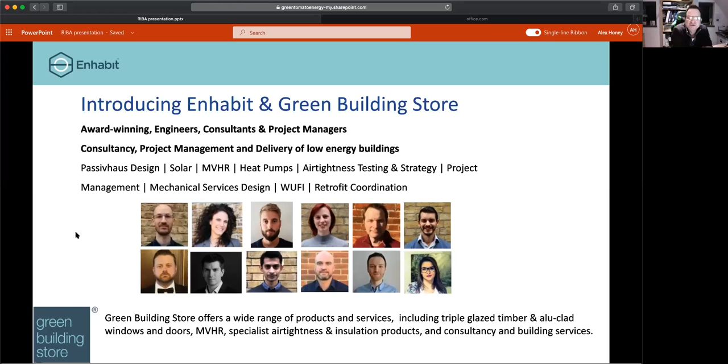I won't bore you about this too much, as I've got quite a few bits and pieces to go through. So just in case you're a bit worried about who I am and whether I really know anything, I'll quickly introduce a little bit about my background.

I did a civil engineering degree many years ago, then spent 10 years in the cement and concrete industry in various roles. I had the pleasure of attending a few manufacturers' advisory group meetings at the BRE in Watford when they were putting together the original Green Guide, which was fascinating in terms of understanding how different trade organisations try to outdo one another and offload their carbon emissions onto another industry. Quite interesting getting involved with those.

I then spent 4 years working for a cement manufacturer that was using waste materials - ground granulated blast furnace slag as a cement replacement material. That's what first got me interested in materials in the built environment.

We also do quite a lot of Passivhaus tradespersons training. I was lucky enough to be clerk of works at Goldsmith Street. I do energy calculations as a SAP assessor, I can also do some air testing and MVHR commissioning, and I also hold a health and safety qualification, so I get involved looking at CDM on site, which often provides lots of fun.

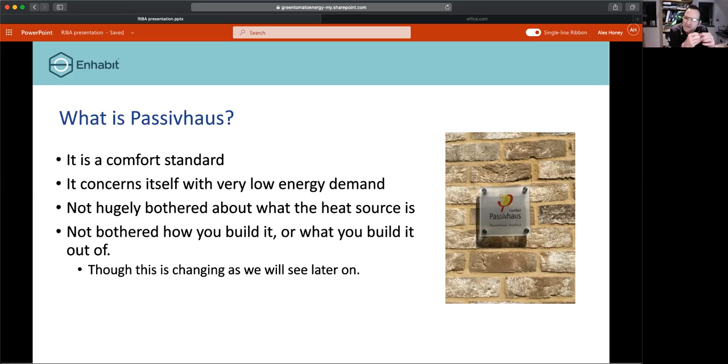And it's not particularly bothered about how you build it and what materials you use, although as we'll see later on, that is perhaps changing. So I'm going to start off by asking: why low energy buildings? Why don't we just build, as we've always done, really poorly performing housing and other buildings and just ignore the whole thing, just carry on? I think it'd be worth spending a few minutes talking about low energy buildings and why they are important to us.

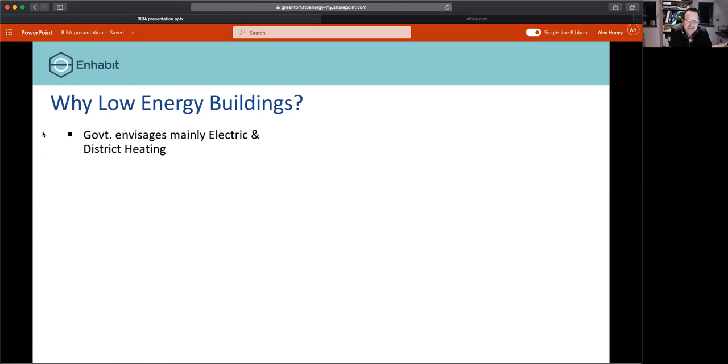So the government envisages that we'll mainly go over to electric or district heating. But the problem with that is that currently something like 85% of homes in the UK are provided by gas heating - your combi boiler or system boiler at home gurgling away. 85% of homes have those.

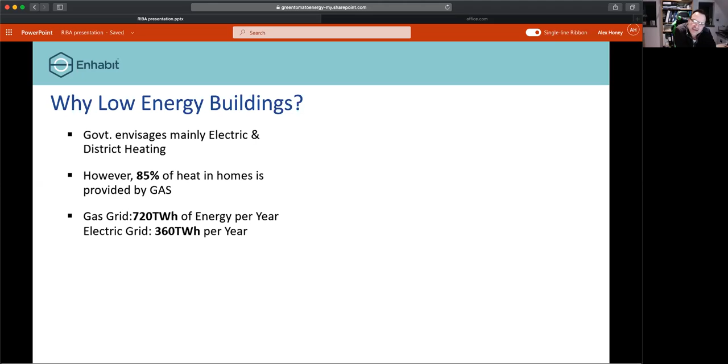If you look at the actual amount of energy supplied per year in terawatt hours, the gas grid is twice as large as the electricity grid. So if we decided to go electric and didn't do anything to our building stock in terms of energy efficiency, the electricity grid would have to be 3 times bigger almost instantaneously if we switched the gas grid off and moved over to electric heating.

Now, people far cleverer than myself reckon that to actually meet peak demand, the electricity grid would need to be 6 times bigger than it is now in terms of capacity to handle that increase in terawatt hours.

So as a nation, at a national level, we can't carry on building really poorly performing homes and other buildings, simply because if we move to electric heating, we won't be able to keep the lights on and provide all that heating via electricity alone. So it's going to be really important that we actually do something about the energy demand, the heating demand of buildings in the UK.

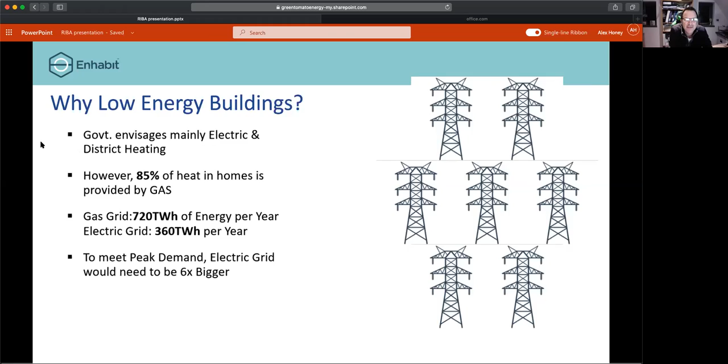I'm sure you've seen it in the press, and there's lots of lobbying going on, and the politicians, bless them, aren't necessarily the world's brightest, and they're all going, oh yes, that sounds like a great idea - so why not hydrogen in the home?

This is a bit of a personal beef about hydrogen in the home. The idea is that they're going to make hydrogen with sort of leftover or excess green electricity, but it's a really inefficient way of getting heat or energy to your house. Putting in an air source heat pump in terms of overall efficiency of the system is probably a factor of about 8 better than putting in hydrogen. So it just doesn't seem to make any economic or financial sense to try and put hydrogen into homes, because if we derive the hydrogen from electricity through electrolysis, it's just a really inefficient way of doing it.

And nobody wants to talk about embrittlement - I'll leave you to Google that. It's where hydrogen gets into metals and plastics and breaks them down. The actual running cost of hydrogen is incredibly expensive at the moment, and may come down, may not.

And then leaks - as a nation, we struggle to keep water in pipes. I can assure you that hydrogen as a molecule is quite a bit smaller than water. If we can't keep water in a pipe, we're probably going to struggle to keep hydrogen in a pipe, I would suggest. And Elon Musk, who's now edged into being the 2nd richest person on the planet because he's backed the right horse, has said hydrogen in cars is staggeringly dumb. And I'm with Elon Musk on that.

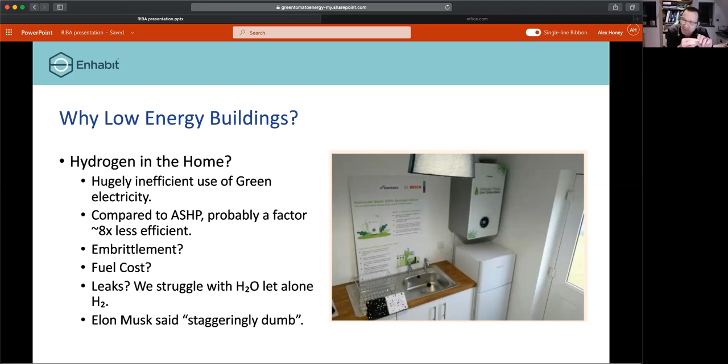So anyway, low energy homes. Our delightful government announced their 10-point plan this week, and we're all going to go around putting in some loft insulation and triple glazing. For about an hour and a half, the Future Homes Standard did get a mention in the 10-point plan, and then it mysteriously disappeared.

Now, we can only assume that Persimmons, like they did with killing off the zero-carbon homes back in 2015, rang the government up and said, how dare you put the Future Homes Standard into your 10-point plan to save the planet - we want to carry on building really poor quality houses. So it disappeared after 90 minutes this week.

So it's fascinating to find out whether or not we actually get the Future Homes Standard that has been kicking about now for over a year. So what is the Future Homes Standard? Well, effectively it's Passivhaus, but without the hard bits. By the hard bits I mean linear thermal bridging, which we'll touch on, airtightness, which we'll touch on, and indoor air quality, which we'll touch on. What it does talk about in the Future Homes Standard is Passivhaus levels of insulation to the floors, walls and roofs.

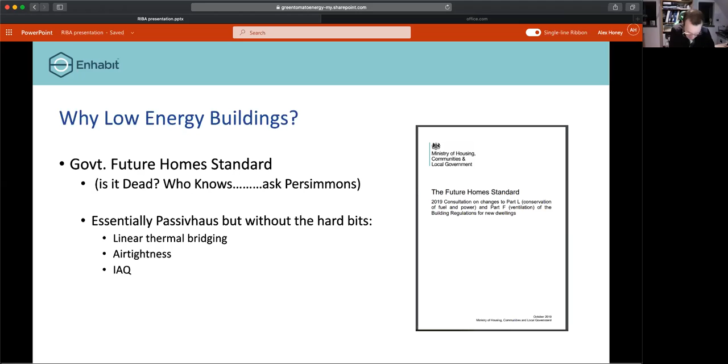It talks about putting in triple glazing, and ideally wastewater heat recovery, and potentially looking at heat pumps and other heating sources. But it's Passivhaus without the hard bits. So let's talk about the hard bits.

Linear thermal bridges are a funny thing, because the more insulation you throw at your building, the bigger the thermal bridges become in importance to your total fabric heat loss. If you put lots of insulation in the roof, walls and floors, there's a possibility the extra heat loss at the thermal bridges could account for 30% of your total fabric heat loss.

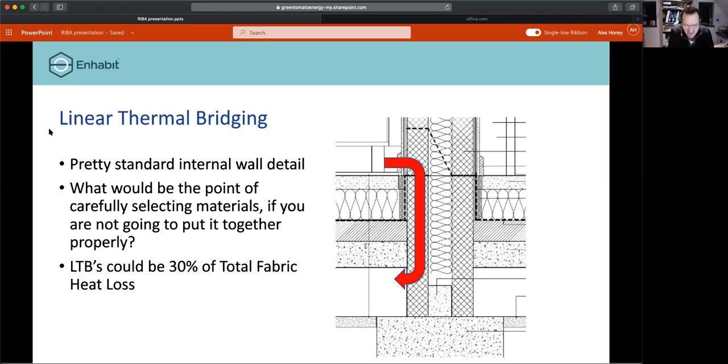So it's absolutely fundamental that if you're designing a low energy house, you really think about how you're going to join the bits together. I could do a whole evening on linear thermal bridging and bore you rigid, but I'm not going to do that this evening - you'll be pleased to know. But anyway, linear thermal bridging isn't really included in the Future Homes Standard, and I think it should be.

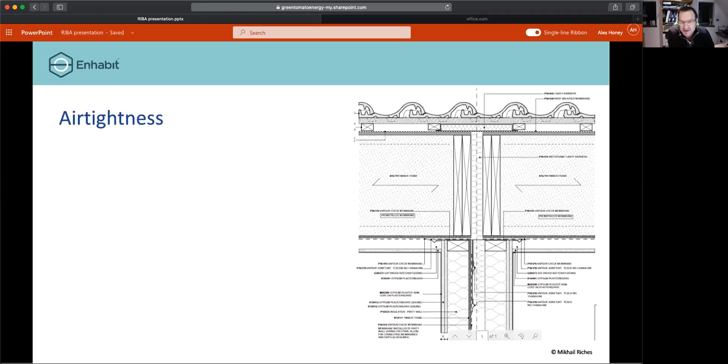Airtightness, yes. This is a section drawing I surreptitiously stole from Mikhail Riches' Goldsmith Street, because this is a passive house building, and it does actually show you where the airtightness layer belongs on the drawings.

Now, I do lots of energy calculations. I'm a very sad geek, and I get lots of drawings from lots of lovely architects and architectural technicians. It's pretty unusual to see the drawings actually identifying correctly where the airtightness layer should be in the building. It's normally left to the builder to sort it out.

And what they tend to do is go to Travis Perkins and buy a roll of that silvery tape, and they start sticking it here, there and everywhere. After a couple of weeks, it kind of falls off again. So as an industry, we don't really get airtightness layers very well.

And it isn't actually a dark art. It's really simple. You take a section drawing and draw a red pen around where you think the airtightness layer needs to be. If you don't put in an airtightness layer, then probably your building is going to leak air, and therefore it'll leak heat.

And the other thing you need to worry about is that an average family on an average day will probably produce about 11 litres of moisture. If you do not think about where that moisture is going to go, especially in a timber frame, there is a chance you might end up rotting the timber frame.

And here we are, talking about embodied carbon, thinking about building materials, trying to make these buildings last a long time and be really energy efficient. If we don't think about an airtightness layer and the thing rots after 20 years, it rather defeats the object of building low carbon, low embodied carbon buildings. So airtightness layer - really important.

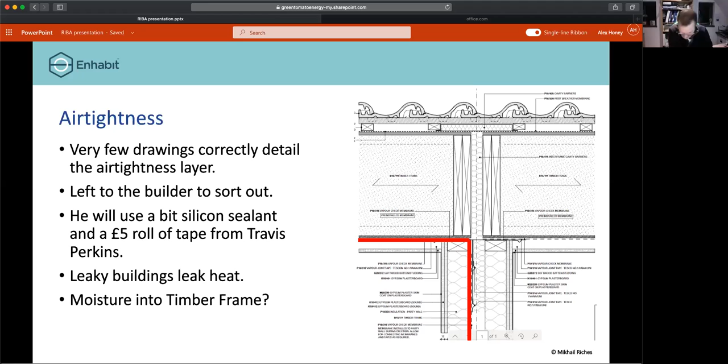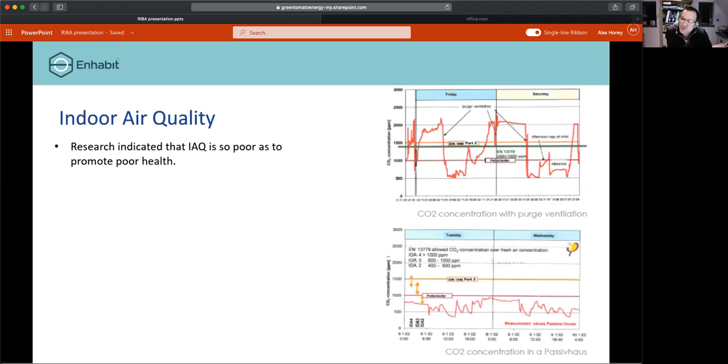Indoor air quality - as part of the research behind the Future Homes Standard and the Part L consultation document, it was admittedly a very limited piece of research, but interesting nonetheless. The research indicated that the indoor air quality of the houses visited was so poor as to promote poor health. It indicated that only 4% of homes fully satisfied Part F of the building regulations.

Let that sink in - 96% of new buildings are failing occupants. Increased air tightness in modern homes is making the problem worse.

And so I asked the question, how much longer are we going to build this stuff? How much longer are we going to build buildings where we don't think about indoor air quality and let the occupants down? Especially this year in COVID, it's one of the big things everybody's been talking about. If you go to your local Sainsbury's, you might hear the ventilation system going ten to the dozen, trying to push in loads of extra fresh air, because we've never really set ourselves up to think about indoor air quality correctly.

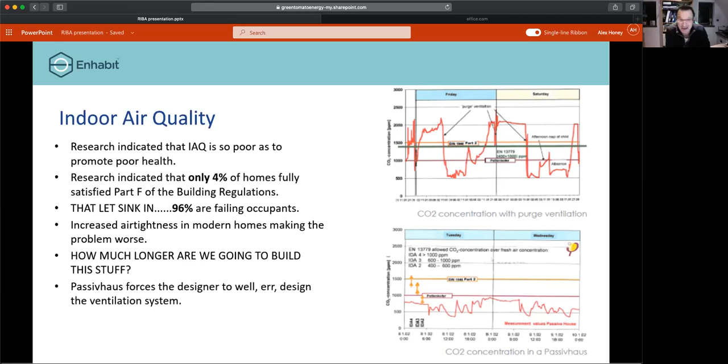Passivhaus forces the designer to actually design the ventilation system. Passivhaus will supply the correct amount of fresh air per occupant, irrespective of the weather. So indoor air quality is really important, and it's not really in the Future Homes Standard to any degree.

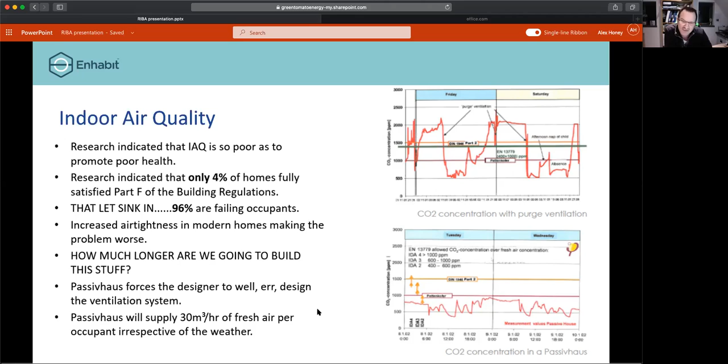So I'm going to get off my horse, and we're going to talk a little bit about embodied carbon. So what is it? Because I'm but a simpleton, I like the simple things. It's basically the carbon dioxide emissions associated with making a building, which I think is a pretty sensible, nice way of putting it.

And if you want the posh version, more precisely, embodied carbon covers greenhouse gas emissions that arise from the energy and industrial processes used in the processing, manufacture, and delivery of the materials, products, and components required to construct a building. So that's what embodied carbon is.

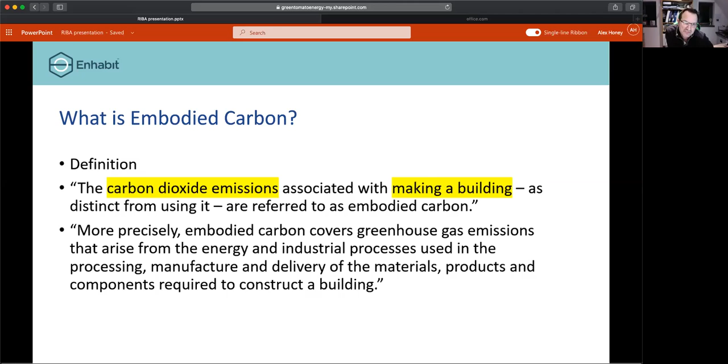So what's the problem? Well, if and when Persimmon let us build low energy homes en masse, our total carbon emissions will actually start to drop in terms of the carbon emissions derived from using the building, from in use. So our gas bill, our electricity bill, or whatever, that will start to drop.

And as that drops, those carbon emissions used in operation of the building drop, the proportion of carbon tied up in the building becomes more and more important. So as we get better at building low carbon homes that require less heating, and our carbon emissions from operating the building go down, it becomes more important that we think about the embodied carbon of the building.

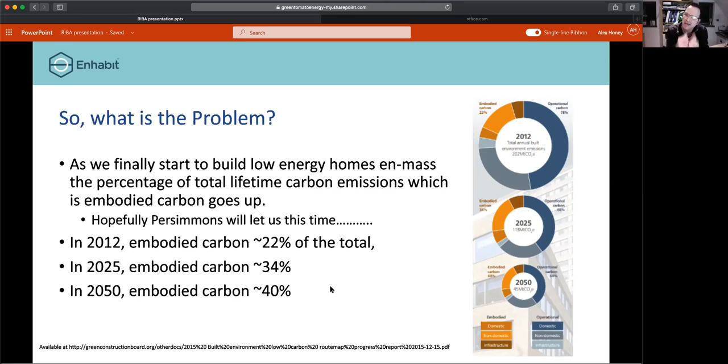It's envisaged that probably by 2050, when we're doing really good low energy buildings, embodied carbon will add up to about 40% of the total carbon of that building in its whole lifetime. So it's going to become more important over time, and I can't emphasize that enough. That's the issue, it's going to become a bigger issue. We're going to get asked more about embodied carbon as our buildings get more energy efficient. It becomes more important.

So what is the solution? Well, the classic little symbol: reduce, reuse, recycle. We get told to use this when we're thinking about stuff in the home, but equally you could think about it regarding the home itself.

So we could reduce our need for new buildings in the first place. Working from home this year has perhaps made us think about making buildings more adaptable, so we need fewer buildings. I was talking to somebody at a university recently who said they think on their university estate they might have 10,000 square meters of building they really haven't got a use for anymore. So it does make us think about whether we actually need to go around building lots of new buildings, because it's not very green and environmentally friendly building new buildings, to be honest. Let's be honest with ourselves.

So reuse - can we repurpose existing buildings via material change of use? COVID again has been really interesting this year, in that it's really pushed buildings, certainly the high street, to be repurposed, I would argue. I'm aware of quite a few projects in the city where the upper stories of quite a lot of department stores are looking to be converted into housing of some description. I have to say, a lot of it isn't done very well in terms of energy performance, but that's for another subject, for another day.

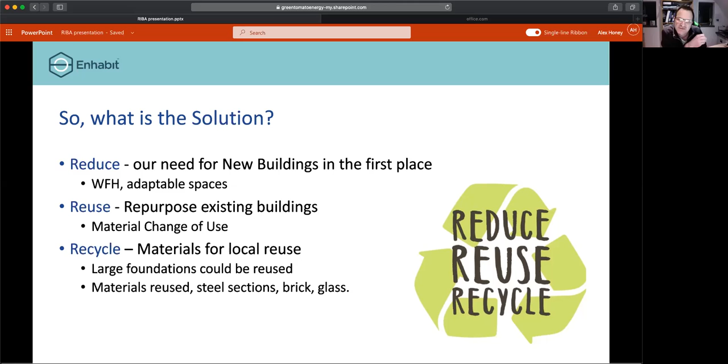So what I'm implying is that on really big buildings, the fairly common method of construction, a concrete frame, there's no reason, because of exposure classes when you look at them, that the building won't last pretty much forever. Most concrete structures, I know you have to talk about depth of carbonation and things like that, but generally speaking...

most concrete frame buildings will last, if they've got some sort of facade to them, pretty much indefinitely. So is there an opportunity, instead of having a retained facade project, to turn it inside out and just take the facade off and make it look really different, but actually most of your embodied carbon is retained within the original structure. So it's sort of a heavy refurbishment.

Do we really need to knock some of these buildings down? Can we reuse elements of the building and retain them? Even things like lift shafts, cores and basement areas could all probably be reused. Certainly in London, it's something we probably need to pay more attention to.

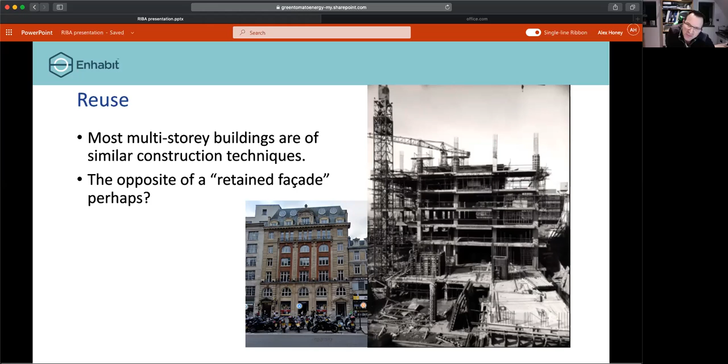If you're wondering, Halton House, which is the photograph there, I was a student engineer, and that looks like a Victorian building, but actually it's a brand new office block behind a retained facade.

So taking it to its nth degree, I'm just highlighting that if you very carefully select your materials, there's no reason why your building couldn't last 2,000 years.

And if you could repurpose or reuse the Pantheon, it would be a fantastic building in terms of its embodied carbon over a 2,000 year period, it would be negligible. If you looked at CO2 per year, that's what it is.

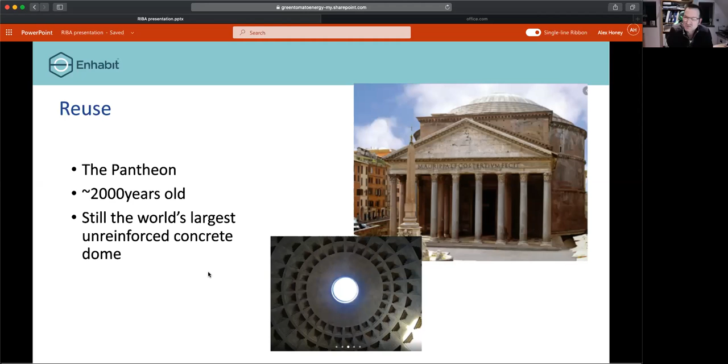So there is an opportunity to really think about buildings perhaps in a different way, as opposed to just building a new building. So, okay, you've decided you can't reuse the building.

There's nothing you can do with it. You want to build a new building. So it has to be new build. Then what? Well, obviously, from what we've already discussed, it needs to be a low energy building. So that's a given.

And if we are going to build a new building, is there an opportunity to use recycled materials? Is there an opportunity to use locally sourced materials? Is there an opportunity to use low carbon materials? These aren't always suitable, but it's worth asking the question.

And we'll run through some different materials and just give you a brief flavour of my thinking, is what I have in mind.

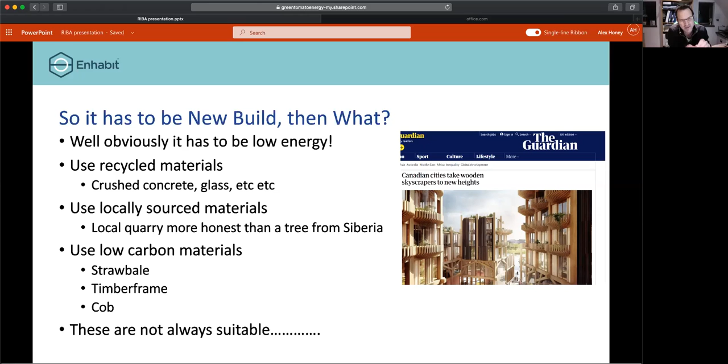So metals, in terms of steel, an obvious one, generally they are very easily recycled. And certainly in the UK, there's very much a supply chain in place to recycle those sorts of materials, metals.

I suppose we're all used to reading about lead theft of church roofs. Metals have high value, so they are often recycled. So there is an opportunity to look at recycled content of the materials that you're specifying.

Ideally, we want to recycle metals because the extraction of metals is often very highly polluting, and often it takes a lot of energy. Aluminium is smelted in electric arc furnaces from bauxite, and I can assure you that the lights flicker when they turn the electric arc furnaces on. It uses huge amounts of electricity.

And in the bottom right-hand corner, I've put in some figures I found. I think these are ICE figures, I think. And it's identifying the amount of embodied carbon in CO2 per kilogram of material.

So if you want 1 kilogram of aluminium, it will produce about 9 kilograms of CO2 to give you that 1 kilogram of aluminium. And that, I believe, from memory, these are UK figures that do include an element of how much is actually recycled already and put back into the supply chain. So these aren't necessarily virgin material figures, these are UK figures based on recycling metals.

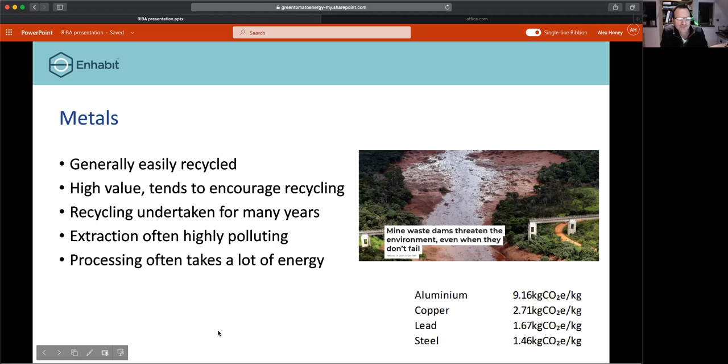So metal frame Passivhaus, I'm not aware of any in the UK. I did find some on the Passivhaus Institute website. There's a few in Germany, and a few in France, and one or two bigger buildings are in steel frame. I have to say, I don't know a huge amount about Passivhaus.

What I did read up on and buy into is that with a steel frame, if you took a traditional portal steel frame, as you can imagine where the steel frame sits on a concrete pad, you have to think really carefully about linear thermal bridging. We don't want any heat loss down through the steel. So you have to spend a lot of time thinking about how that steel frame works, such that the insulation goes over the top of it and you don't end up with any thermal bridging.

You also need to make sure that the airtight barrier is on the outside of the steel frame for it to be continuous, but it still needs to be inside the thermal envelope. So there's quite a lot to think about when you're doing steel frame buildings to Passivhaus.

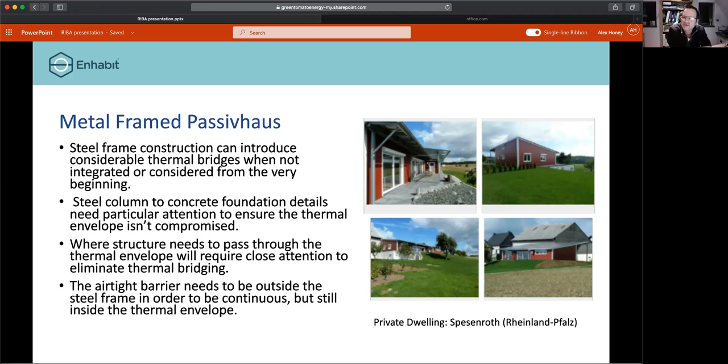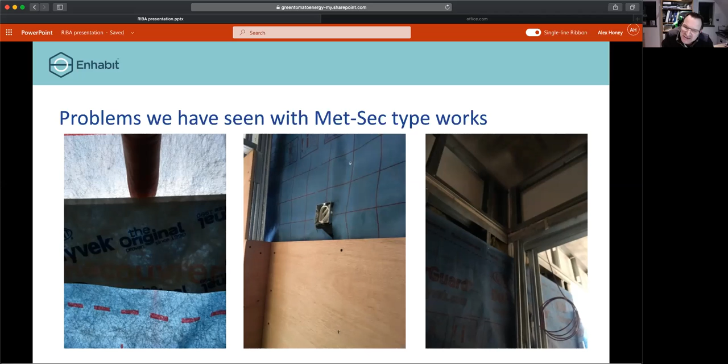The airtightness layer up above needed to go in before that doorway went in. Because if you now try to retrofit the membrane to the top part of that wall, it's going to be really difficult to get an airtight seal where that doorway is. It's almost impossible. So think about the order in which things go into a building such that it's easy to create an airtight envelope.

Concrete - I could do a whole lecture on concrete, but I'm not going to do that to you. I'm far too kind. What I would say is that roughly 50% of the embodied carbon is in the cement, as in Portland cement, not in your waste products like pulverized fuel ash and ground granulated blast furnace slag.

Weirdly, globally, we're actually more worried about running out of suitable sand than we are about running out of cement. And if we're talking about embodied energy and sustainability, it's worth flagging up that in London and the southeast, most of the aggregates come out of the North Sea, so it's not necessarily a hugely sustainable source of material.

You could try using crushed concrete into your new concrete. The problem is a practical one - we're not very good at investing in concrete plants. If you go to a ready-mix concrete plant here in Norwich, for instance, you won't find one capable of taking a 40 mil stone. And if you crush concrete down to less than 40 mil, it ends up mainly as dust, which isn't a lot of good to anybody.

We're actually hampered here, locally and nationally, by ready-mix plants not being able to take different aggregate sizes and different aggregates, such that we could go for a higher recycled content concrete. So it's all a bit disappointing, really.

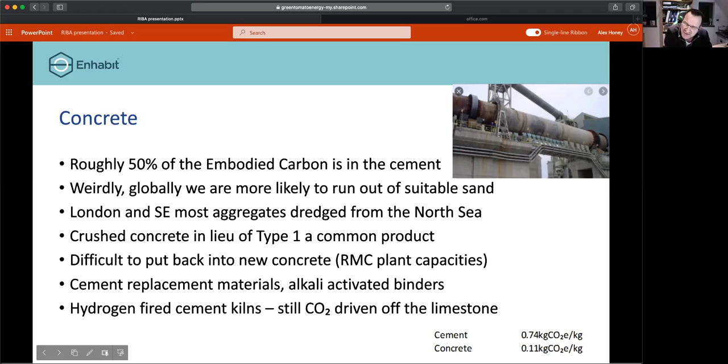So normal concrete is always going to be a fairly high embodied carbon material, and so you need to try and minimize the amount that you're using. But interestingly, per kilogram, concrete is only 0.11 kilograms of embodied carbon per kilogram of product. So in some ways it's much better than steel.

ICF - hopefully you're vaguely familiar with ICF. ICF is insulated concrete formwork. It's basically Lego bricks made out of polystyrene, and you put them together, and it leaves a void in the middle which you then fill up with concrete to create your structural wall. Really nice system - there's several around, Beco, Logix, there's others. In terms of putting the Lego bricks together, it's as easy as anything, pretty much, once you've got your first base course down.

What I would suggest is that casting the concrete successfully is quite an art and quite tricky. Therefore, if I was doing a self-build using insulated concrete formwork, I would put the Lego bricks together, and then I'd get specialist guys in to do the concreting element for me. It can go wrong very easily.

Weirdly, these buildings are cool in summer. Historically, we're told that if you have a lightweight structure - and in this case, indoors, if you think about it, it's polystyrene and plasterboard for the first couple of inches of the wall - you would be told that's a lightweight structure and there wouldn't be any cooling effect given. But there seems to be some kind of more deeply odd relationship going on with the concrete hidden away within the structure. So these buildings, somewhat counterintuitively, actually work really well in summer months.

One of my kind of questions is that a lot of these products are a mixture of polystyrene and nylon, and then obviously you've got concrete in the middle. So the question is, at the end of these buildings' life, are they recyclable?

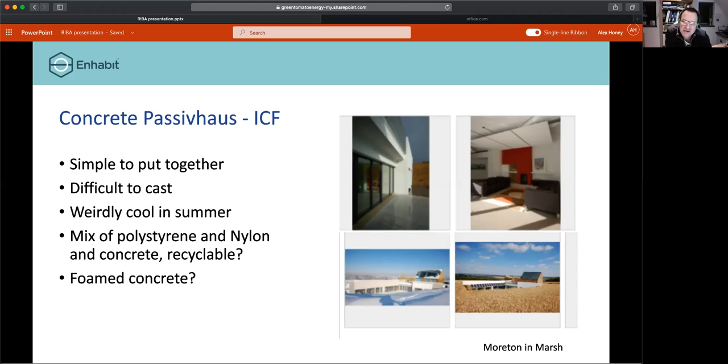Wood - yeah, that fantastic renewable product. It is really good, and it's probably the best material out there in terms of embodied carbon. But a lot of it, most of it, is plantation wood, which isn't considered very biodiverse. Also, soil erosion and soil acidification are known problems when we're actually harvesting plantation wood.

And I will also flag up, especially for some of you lovely people who do like your Siberian larch - it has travelled 3,500 miles to get here. So you do have to wonder about the embodied carbon of hauling wood halfway across the globe. So you kind of think, well, what about local wood?

At the Enterprise Centre, they did use wood from Thetford Forest for some internal work, considered non-structural. It's great because you chop the tree down in Thetford and bring it to Norwich, but it needed grade testing. So the trees actually went to Ireland to be tested, then brought all the way back. It went from Thetford to Norwich via Southern Ireland, which seems slightly daft. If we are going to use homegrown wood, we need UK testing facilities, or a way of using non-structural timber that doesn't need testing. The other thing about the UK is we're a maritime environment and trees tend to grow too fast, so most of our softwood is not of great quality, unfortunately.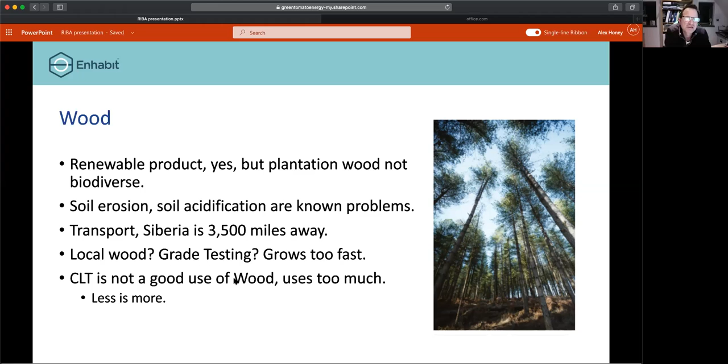Timber frame is quick to erect. These panels come to site, and you can put a whole house together in the space of a few days if the roof structure is pretty straightforward. As soon as those fantastically able architects come up with great ideas of big wide openings that look fantastic on drawings, you're automatically introducing steel. Steel goalposts and timber frames just complicate things in terms of linear thermal bridging and getting airtightness to work. So if you can, because everybody loves big bifold doors, get away from that and work to the maximum spans allowable within a timber frame, it would be much more beneficial for everyone.

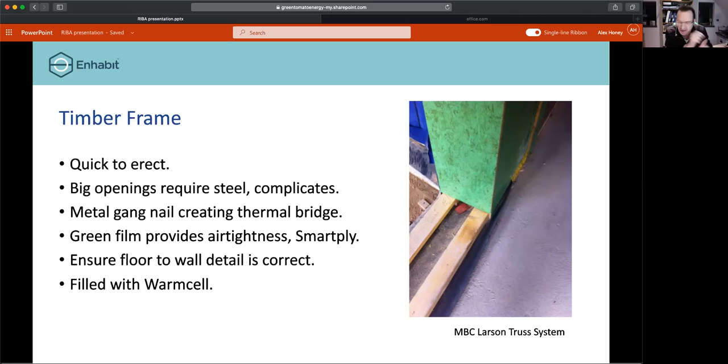This particular building, and also Goldsmith Street, were filled with warmcell insulation, a system developed in Wales originally. The company went bust, all the kit went out to Czech Republic, and we now import all the warmcell, but it's basically mashed up and treated newspaper in a pulp form. It's a fantastic product, very low carbon - you're quite literally recycling paper into insulation material, really nice material to use. There are some really good installers that go around putting this stuff in, and I take my hat off to them. It's quite an art when you watch them use a magic hoover to place the warmcell - one of those dark arts, so you kind of go, that's quite impressive.

Clay brick - quite a lot of it these days, unfortunately, is imported. The bricks at Goldsmith Street, for instance, came from Belgium. Wienerberger is Austrian in nature, so there's quite a lot of brick that we seem to import. It's a very heavy material, so to transport it halfway across Europe is, in terms of carbon, really not a very bright thing to do. You've then got quite high firing temperatures of about 1,000 degrees centigrade, so you're using a lot of gas, getting quite high embodied carbon that way. If we went back to using traditional lime mortars, we could actually reuse those bricks over and over again.

I live in a tatty cottage here in North Norfolk, and to be able to take down a little bit of lime brickwork and redo it with lime mortar means those bricks are 200 or 300 years old, and they're almost as good as the day they were made. They're soft Norfolk reds, so you've got to be a bit careful with them, but they're still ultimately usable.

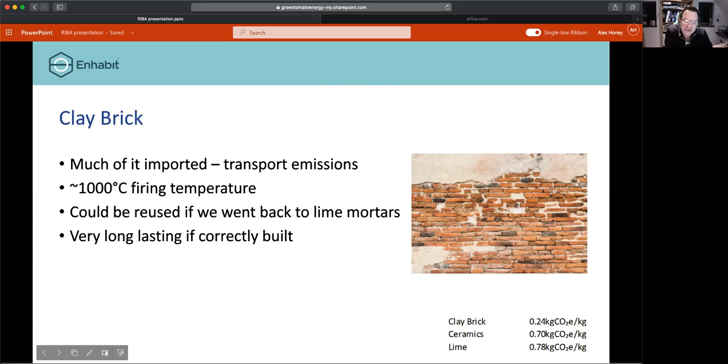I've put in the bottom right-hand corner the embodied carbon per kilogram of brick and ceramics, things like wall tiles, and then lime itself. So clay brick, I like it a lot.

A play on clay brick is Porotherm, which is like an aerated, extruded sort of brick, and they used it at Carrowbreck. A really nice product, and when you actually handle the material, it reminds me of the clay pots you find in the garden centre.

It's quite brittle as a material, so when you go to drill it, as in to put up curtain rails or other stuff during construction, it wasn't the easiest product to use from that perspective. It's meant to be machine planed, so when you put it together you can use thin joint mortar, and you just dob it together - there's no mortar to the perps. You're laying a whole spread of mortar across a wall, and then you're just dobbing these porotherms together. What the bricklayers found was that these blocks weren't quite true enough, and they were ending up with tiny little wedges here and there to keep the brickwork vertical. It turned into a relatively expensive process.

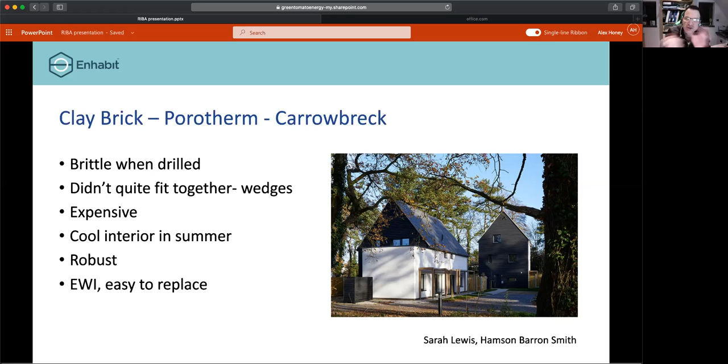What I would say is that these particular buildings at Carrowbreck - it was a really hot summer, and it was a joy to go into these buildings on a hot summer's day. They were really nice buildings to be in. It's a very robust system. The other thing I like about using Porotherm - it's a solid wall, there's no cavity in this method of construction - is that your external wall insulation is all on the outside, and if it ever gets damaged, you can see the damage and it's easy enough to replace. So I quite like it as a system, it's got a lot going for it.

Now we're getting into a kind of - this looks a bit more interesting. Hello, what's going on here? Hang on, sorry, I've just got something coming out on my screen. Let me just get rid of something on my screen, because hopefully, right.

So cob, or straw bale. Cob, which we would locally call clay lump, you do see a bit of it in Breckland in traditional buildings, and I've seen one or two buildings along Wymondham way as well. It would be a mixture of straw, clay, probably a bit of cow dung, sand, and sometimes a bit of lime to create lumps or bricks locally.

If you're making cob, it would be more of a rammed earth sort of setup. So you'd make shutters as though you're doing an in-situ concrete wall, and instead of pouring concrete in, you chuck the cob in, then chuck a couple of children in, or something suitable, and you jump up and down on it to actually compact it.

It's one of the most ancient materials out there, and it's a fantastic material. It's quite often quite slow. The material costs are really low, but the labour costs are really high. So you tend to see cob being done as a self-build, because it's not very high tech and you've got plenty of time available if you're self-building, and the material costs are really, really cheap. Unfortunately I've never had the pleasure of doing any cob or clay lump myself, which is a bit of a shame.

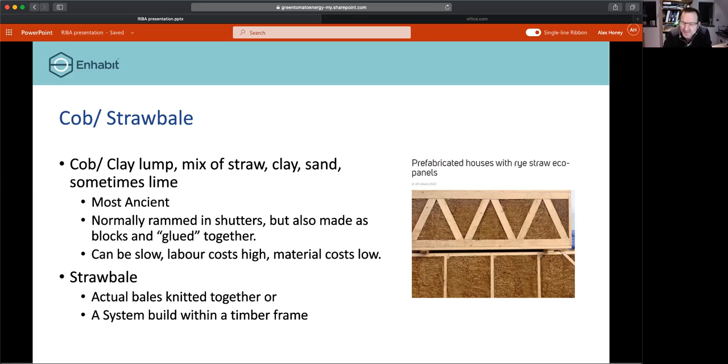The other system is to use straw within a timber frame, as per the image on the right. This particular one is called EcoCocon. I quite like this - it's a really quick system, and it got used on this house, which belonged to the late great Martin Newton, who was one of the sustainability and energy guys at the University of East Anglia.

Architecturally, it's not a particularly interesting house externally, but inside, it's probably my favourite house. It's used clay plasters internally, we've got MVHR in there, so the air quality is really, really high. There's no gypsum plaster. It's a beautiful building internally, and Lil, Martin's widow, is really keen for people to come and see this building. It's a Passivhaus in terms of its standard, and it's a really nice building to get people thinking about materials.

It's got a lime render externally, and as I say, clay plaster work inside. It is genuinely worth a visit as a building to admire the internals, not the externals.

As a system, it was really quick to put up. I think they did the whole of the straw in a week. So you've got a building with a roof on within a couple of weeks. The actual putting the timber frame together with that straw in it is a really fast process.

Obviously, the clay plasters, if you're doing that by hand, they had sort of family days where they got 20 people and a barbecue going, and they all started splattering clay everywhere. That is a slow process, and perhaps that's where we need as an industry to think about how we could speed that process up, such that it could be used in proper buildings on proper sites, and perhaps even adopted by volume house builders, because it's a very low embodied carbon way of building our housing stock.

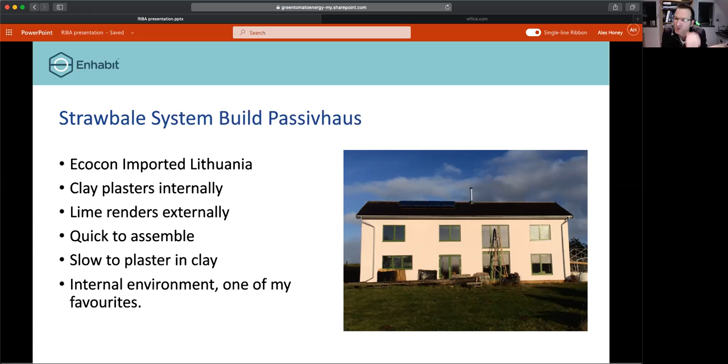Plastic, I've just given you a selection of those. EPDM, so that's your sort of single ply membranes on roofs. I did do quite a lot of reading. You can recycle it, and Firestone are looking at recycling EPDM, but not if it's glued down. So they're looking for sort of mechanically fixed methods of doing flat roof construction.

That takes us into thinking a little bit about how we use our materials and how we put our materials together. At the moment we think about CDM and health and safety. You're obliged as designers to think about how that building is going to be built and how it's going to be dismantled. We probably need to think about how we dismantle a building from a recycling those materials perspective in the future. Your choice of glues and adhesives or mechanical fixings might determine whether or not that material could be recycled at the end of its life.

And those decisions that you make will have an impact on those in 60 years' time that then start to fiddle with your building. So they're the things that perhaps we need to think about - we're just in its infancy with this, and perhaps we need to give it a lot more thought.

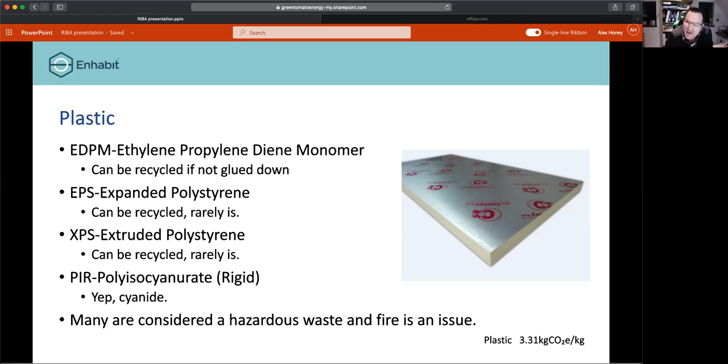All of those materials are oil-based, and as you can see, they've got quite a high amount of energy embodied in them. You've got over 3 kilograms of CO2 embodied per kilogram of material. Now obviously these are being foamed up, and most of them are lightweight, so your 3.31 kilograms of embodied carbon will go quite a way, but they are energy intensive. And although most of these materials can be recycled, I haven't seen much evidence that we actively recycle these and put them back into materials, either UPVC windows or insulation materials. I think it's coming, but it's not really happening in a way that it should.

Yeah, gypsum. We all think about our 3 mil skim, don't we? A bit of plasterboard, chuck it up, skim it out, and off we go. We don't really think about plaster, but it's an anhydrite binder - that's calcium sulfate - and most of it comes from coal-fired power stations, unbelievably.

We discovered with acid rain that most of these coal-fired power stations were belching out all sorts of sulfurous fumes. So they started to desulfurize the gases coming out of the flues at coal-fired power stations. It's an electrostatic process - it's like a mesh that's electrostatically charged, and then these sulfur products fall out. So we're actually using gypsum plasters that are based on coal-fired power stations. And so the question is, what happens when we stop burning coal?

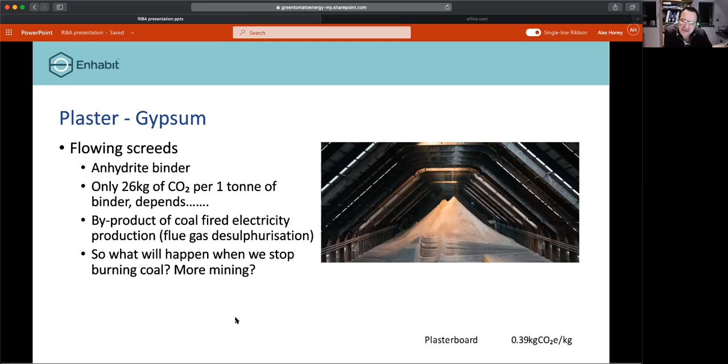Where's this plaster going to come from? Are we going to have to start digging more holes in the ground? It's a common enough material, but at the moment we're making use of it as a byproduct. Don't forget, naturally occurring gypsum ends up in toothpaste, cosmetics and God knows what else. So it's going to become more expensive once the coal-fired power stations are shut down, and we need to think about where these materials will come from in the long run. It's an interesting material, with an interesting future ahead of it.

I'm only going to touch on this briefly because I get asked a lot about thermal mass in Passivhaus - do you build a huge, dense concrete building, or a lightweight timber frame, in terms of thermal comfort? In the round, Passivhaus isn't overly excited about high thermal mass. It does take it into consideration within the calculations, but it would rather you think about it on a daily basis, not a seasonal basis.

You don't want that building in summer to get ever so slightly hotter each day. In really high temperature periods, really hot summers, you don't want it to be 21 degrees one day, then 21.5 the next, then 22, and so on. That's not what you really want. So try and think about thermal mass and what it can do for your building on a daily basis. It can certainly ameliorate the maximum temperature you find. If you ever walk into somewhere like Norwich Cathedral on a really hot summer's day, you can really see the benefits of high thermal mass.

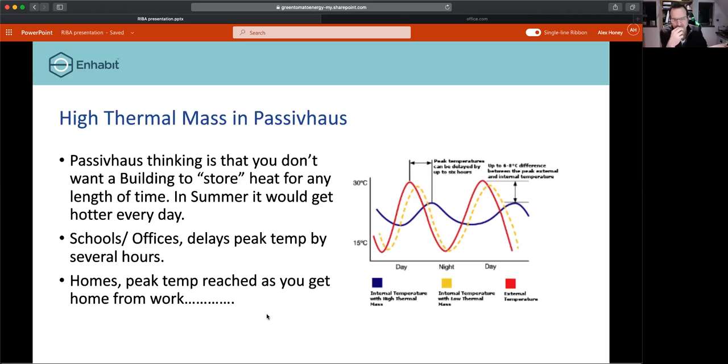The downside is that it tends to shift the peak temperature later in the day - you get this 4 or 5 hour shift. Typical peak temperatures are perhaps 2 or 3 in the afternoon, but in a high thermal mass building your peak temperature is actually reached at 5 or 6 o'clock, which in a house is when you get home. So be mindful - high thermal mass might make sense in an office or educational building, but might make less sense in a house. Just be really careful about thinking about thermal mass.

As I said at the beginning, Passivhaus wasn't really interested in materials or embodied energy. That is starting to change, and there's a lot more research and talk within Passivhaus circles about embodied energy. Here in the UK, the Passivhaus Trust and the AECB, the Association of Environmentally Conscious Builders, have been working with a guy called Tim Martell, who's developed software that plugs into the Passivhaus planning package and picks up about 80% of the materials used in the building. This means we can quickly work out the embodied carbon within a building by modeling it in the Passivhaus software, pressing some extra buttons, and it tells us what that embodied carbon is.

What I've put at the bottom is: to improve performance looking at embodied carbon, we need to start by measuring where we're at now. At the moment, if I asked any of you lovely ladies and gentlemen what the embodied carbon of your building on your design desk today is...

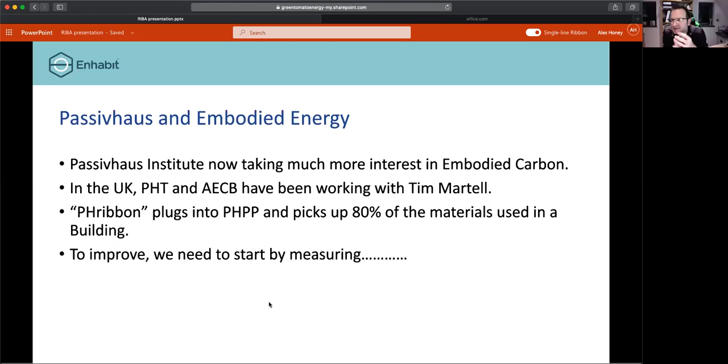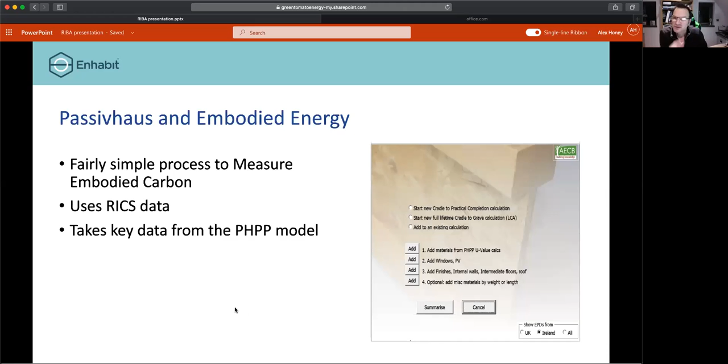Taking a lot of data that we're entering into the Passivhaus software, reusing that data, and taking some RICS data about embodied carbon, it starts to tell us what the embodied carbon is for the whole building. It's pretty straightforward - what used to take days and days, we think we should be able to produce meaningful results within about a day's work, which is much more useful and cheaper. The outputs available are CO2 embodied per person, per square metre of the building, or per building. So it's an opportunity to look at it per building or per wall type - if you want to compare different walls and look at the embodied carbon, we can start to do that.

The thing is, it's still being formed, still coming together. There's still lots of data missing. Also, transport of these materials is really important in the overall figures, and that's in its infancy. Understanding how far has that brick travelled - has it come from Belgium, or from Peterborough, or wherever we're still manufacturing brick in the UK? It's really interesting. There's a lot of data missing, and lots of stuff we still need to put in, but it's a start. It's a really good start.

The other thing that's missing is understanding how recyclable those materials are at the end of their life. If I use a brick wall with lime mortar, it becomes much easier to recycle and reuse those bricks in the next building. How do I capture that in these figures, in this initial building? How do I think about those materials being used in the next building and the building after that? Roman brick is still kicking about in various walls in the UK, and they're 2,000 years old. Brick, in theory, can last forever if it's looked after and treated correctly.

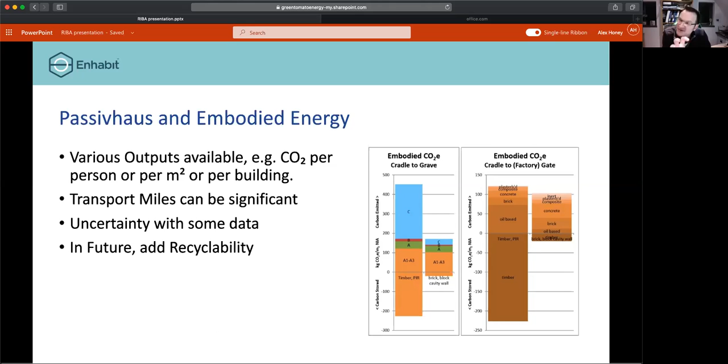One example Tim had on his website, which I've sort of lifted - Tim Martel is the author of all this sort of stuff. He was showing that a typical semi probably contains about 10 tons of embodied carbon, and he reckoned that some of these Passivhaus buildings, the total carbon in terms of in-use operational carbon and embodied carbon may only be 14 tons. So there's opportunities here to look at how much carbon is embodied and the total amount of carbon in that whole lifetime of the building.

We're starting to be able to put some answers in, and we're starting to get some data. So it's really interesting stuff. As I say, it's still work in progress, but it is an excellent tool, and it's something that we as a business hope to try and trial and use sometime in the near future. I think it's fascinating stuff.

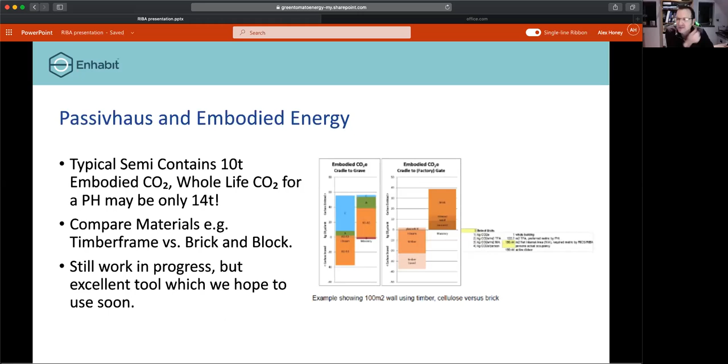Now, you could all say to yourselves, I'll carry on regardless. And I say to you, I think that's a plausible plan for the next 4 or 5 years. I think you'll get away with it. You might even just get away with it up till, say, 2030. But I think, as you can see with what the government announced with their 10-point plan - you've got COP26 in Glasgow next year, COVID depending, you've got Biden now as president - you're going to see quite a lot of pressure now coming on, looking at carbon and our energy use.

We're talking about electric cars, electric heating. I think we will come to a point in our lives where we will be given a carbon budget or a carbon tax as individuals. And I think the building industry is on track at the moment in the UK to be the next coal industry in terms of bad PR. Who wants a job at a coal mine in terms of thinking about carbon emissions? It's not really the sort of thing you want to put on LinkedIn - oh yes, I work in the coal industry. And if we're not careful, I think the construction industry is going to end up as the next coal industry. Let's not go there, but I think that's where construction is going at the moment.

I think as individual professionals, there's a reputational harm if we keep knocking out designs that are high carbon and very poor in terms of energy performance. I think you're going to become socially unacceptable, like smoking or drinking and driving. I think attitudes are starting to change, and we as a business are getting to the point where we are probably going to start to say to clients, I'm really sorry, we'd love to work on this project, but it really isn't for us because it's not Passivhaus. I think that's where we're going, and I think that's where we all need to go, pretty sharpish. And I think we will, kicking and screaming, but we will get there.

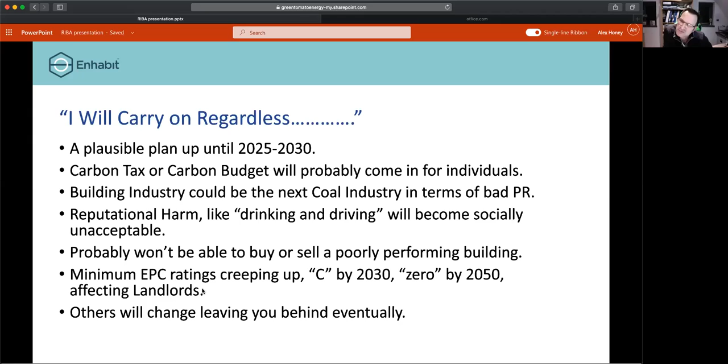So if you think I'm just a bit of a geek and a bit of a nutcase, and you're thinking I'm out on a limb here, this was last week's Torygraph: major house builders ditch plastic as they replace material with mushrooms, seaweed and bamboo. They were looking at taking plastic out of insulation materials and changing some of the materials used in buildings. And the headline goes on to say 50,000 tonnes of plastic waste are produced by our industry each year, and 40% of that goes to landfill. I would suggest that carry on regardless isn't necessarily a good option.

So, conclusions - and I've actually done quite well time-wise, I hope. Low energy buildings are a must, otherwise our electricity grid will never cope. And I personally don't think hydrogen is going to be our salvation, unfortunately. Therefore, I also think that low embodied carbon buildings are going to become commonplace. I really think it's in its infancy and we're all going to ignore it for another couple of years, and then it's going to be wham, bam - what's the embodied carbon in this building? And we're going to go - and it's coming, I know it's coming. People are really going to be talking about this much more than they are now.

And I think we need to educate our clients about low energy buildings, about embodied carbon, such that they don't end up with stranded assets, because that's the way it's going. If you owned a coal mine, you are going to end up like an oil well and gas well eventually - you are going to end up with stranded assets. They're talking about trillions of dollars of stranded assets globally. And there's no reason why your clients with building assets can't end up with stranded building assets.